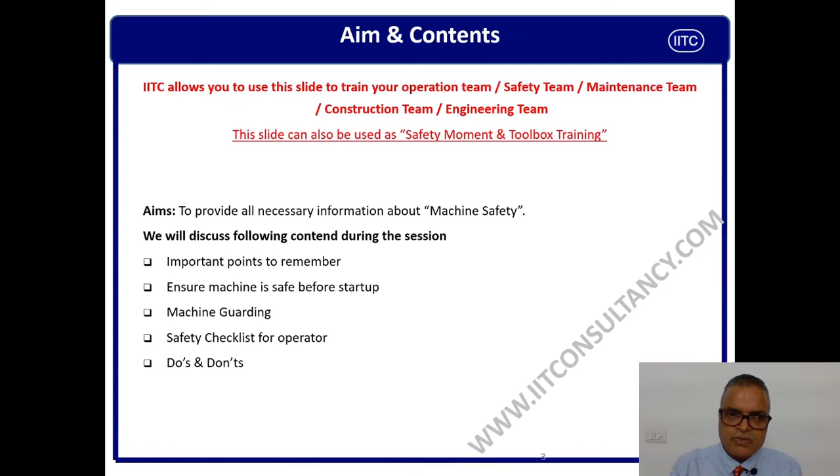Guys, we will not repeat what we are going to see, we have already covered that in the first slide. Let us go on the session straight away.

Important point to remember, guys: before starting up any machine, we have to check the integrity. This is very important because if you are not able to check the integrity of the machine before startup, this can create a problem when it is working. There should be a complete checklist of the machine before it is started, as per the OEM, original equipment manufacturer, or machine supplier. We have to check the machine before it is started so that it is working safely throughout. The machine should be free from defects.

Guys, when you check each and every part of the machine before startup, you will definitely come to know if there is any visible defect or problem, and you can remove it. The machine should not be started with defective equipment, defective bearing or defective spare parts.

Always read the manual before startup. Guys, each machine has its own startup system, emergency shutdown system, and normal shutdown system. Each and every machine has its own list of hazards and its own risk matters. So guys, before you start any machine, or deploy any person on the machine, please train the person and allow them to read the manual before startup, so that the person is familiar with the hazards of the machine.

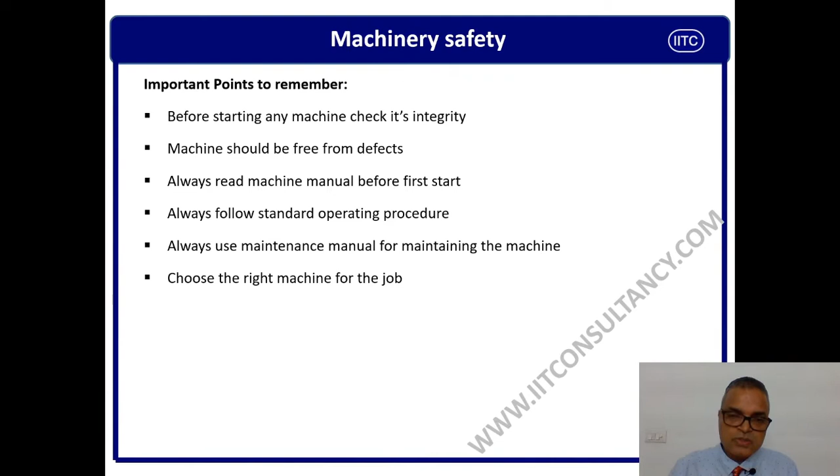Choosing the right machine for the right job is very important. Specifically, if you are using hand tools, don't use a hand tool on the wrong job, because this can create a problem. Ensure the machine is safe. How do you ensure the machine is safe?

If you are not able to ensure the machine is safe, this can create a problem when the machine is working. You have to ensure the machine is safe as per the manufacturer's advice, and that it is free from hazard before use. This is your duty - check as per the checklist of the equipment manufacturer, remove the hazard, then use the machine.

Always deploy a trained operator on the machine. This is a legal requirement - you should not deploy any untrained person to the machine. Always give induction, safety training, and training on how to operate before you deploy any person on a specific machine.

Always ensure the operator is competent and knows about the hazards of the machine. The person should be competent and healthy, and he should know what kind of risks and hazards are there with the machine, so that he can avoid any unwanted events.

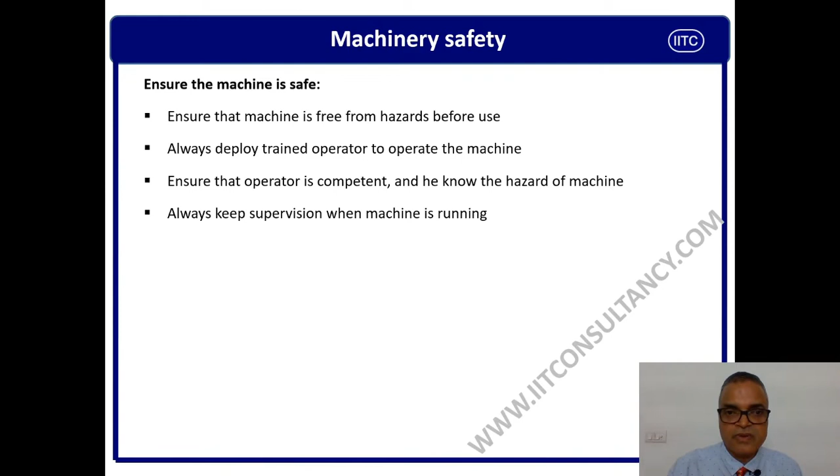Always keep supervision when the machine is running. No machine should be used or run in the absence of a supervisor or operator. This is a very important point.

What we are going to discuss now is machine guarding. As mentioned earlier, I have prepared a specific program for machine guarding - feel free to search the IITC channel, you will get a complete idea about machine guarding. Let us go through that.

Ensure the rotating part of the machine is appropriately guarded. All rotating parts of the machine should be machine guarded - if not guarded, it can create a problem.

Fixed guard should be used to enclose the dangerous part of the machine. You should always hide or barricade all rotating parts by means of fixed guarding.

Ensure the guard is placed back after maintenance. I have seen that during maintenance, the machine guarding is removed, and afterward people forget to put it back on the pump or rotating equipment. This can create a problem, so always ensure your maintenance team puts the machine guarding back after maintenance.

Ensure the machine guarding is always maintained in good condition. If you are not able to maintain it well, the machine guarding will probably not work, and this can cause an accident.

Always use the right guard as per specification. There are fixed machine guards, automatic guards, interlock guards, and distance guards - this has to be as per the specification of the original equipment manufacturer, and always keep the machine guard in a well maintained condition.

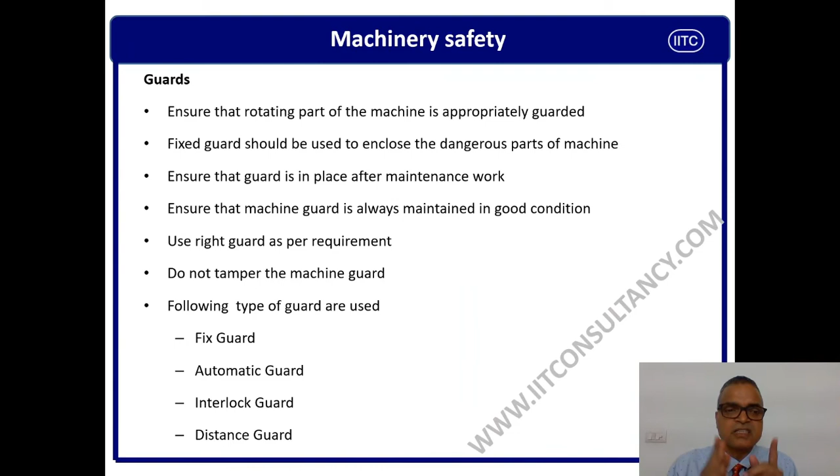The following types of machine guards are always used in the industry: fixed guard, automatic guard, interlock guard, and distance guard.

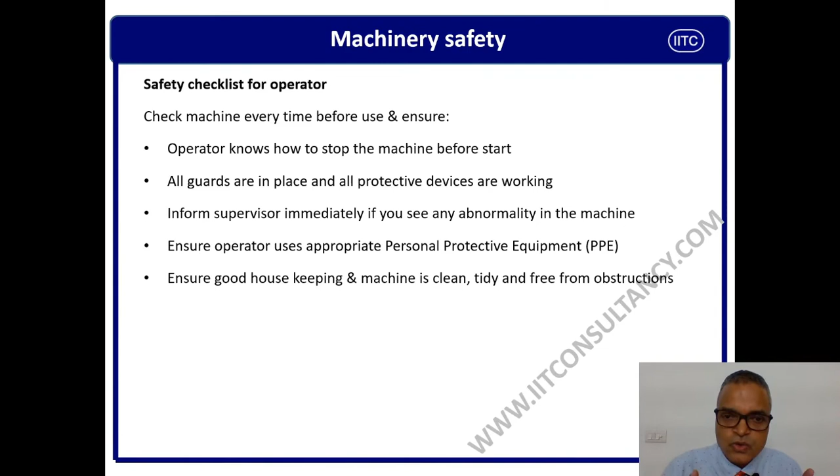Ensure the operator uses appropriate PPE like helmet, safety goggles, face shield, ear muff or plug, hand gloves, apron, and safety shoes. Ensure good housekeeping - machine is clean, tidy, free from obstruction - because good housekeeping will prevent a lot of accidents.

Now, do's and don'ts. Every machine has its inherent safety measures and inherent hazards. So we should know what are the do's and don'ts as per the original equipment manufacturer or supplier.

Use the machine only if you are authorized and trained to. Don't run or use any machine if you are not trained or not authorized.

Never try to clean the machine while it is in motion - never try to clean it when the machine is rotating.

Don't use any machine or appliance which has a danger sign, because you do not know the meaning behind that danger sign. If you start it anyway, you will put yourself in danger and you will put others in danger too. Never remove a danger sign.

Never try to remove the danger sign, because if you remove it, someone may come and start working on the machine, putting himself in danger and putting his colleagues in danger.

Don't wear chains, rings, loose clothing, or have long hair untied, because this will create danger when working on a rotating machine.

Don't distract people who are working on a rotating machine, because if you distract them, they will put themselves in danger.

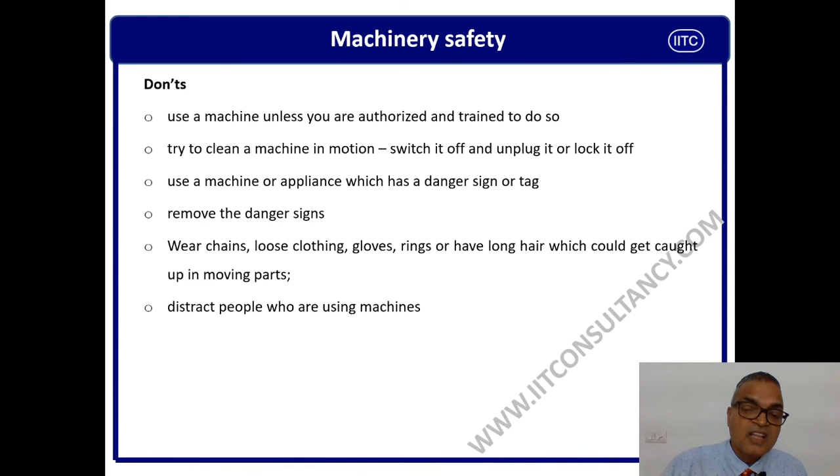There is a hierarchy of control, ERICPD: Eliminate the hazard, Reduce the hazard, Isolate the hazard, Control the hazard, use of PPE, and Discipline.

I have prepared a different module, a different presentation for risk assessment, which covers the hierarchy of control. I would encourage you to please go through that presentation - it will give you a complete idea about the ERICPD principle.

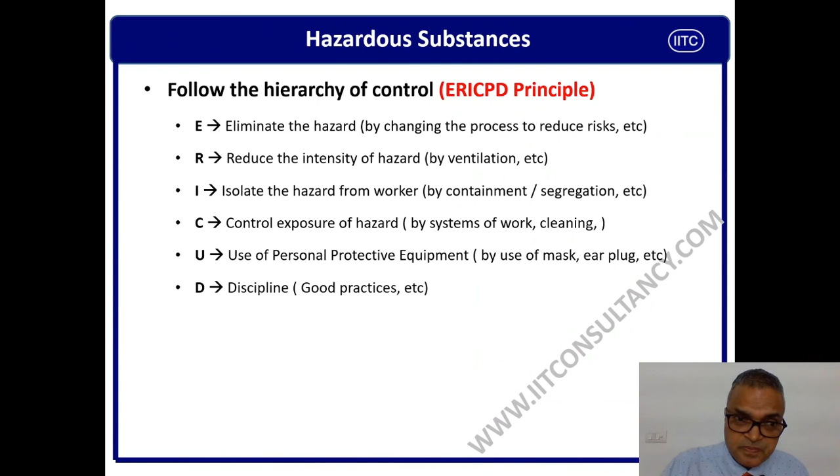I hope this was a very short presentation and you loved it. Now the turn is yours - you have to answer the question. I am going to ask the question, and you don't need to tell me now since you are away from me, but you know what you are supposed to know.

How do you ensure the machine is safe before start? What do you mean by machine guarding? We have seen machine guarding, and I have also prepared a dedicated program module for machine guarding - please search in the IITC channel and you will find it.

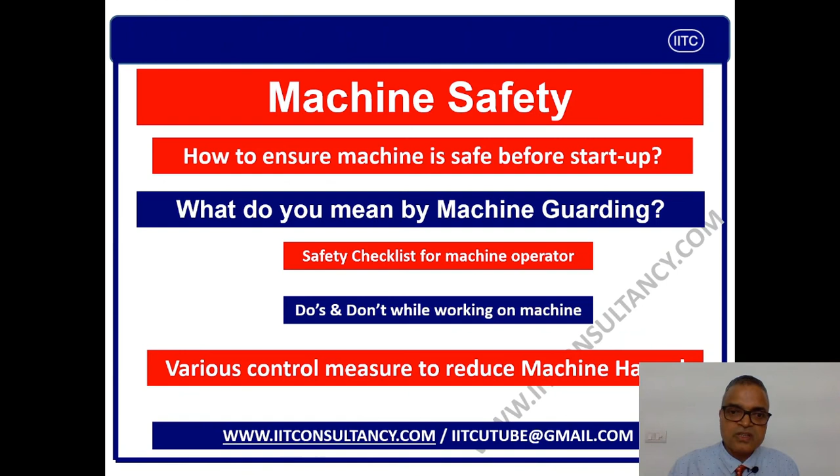Safety checklist for the machine operator, do's and don'ts while working on the machine, and various control measures to reduce machine hazards.